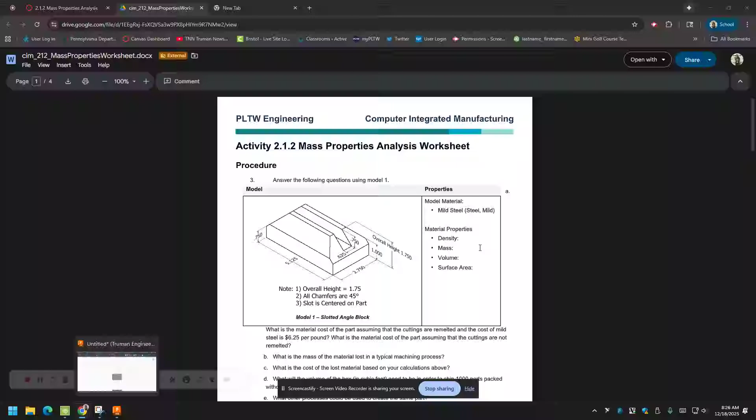All right, so we're here. I'm going to start a sketch on the top plane, and go to rectangle. There's a center rectangle option - this allows us to keep everything symmetrical and centered. Just helpful. The next thing I'm going to do is put in dimensions.

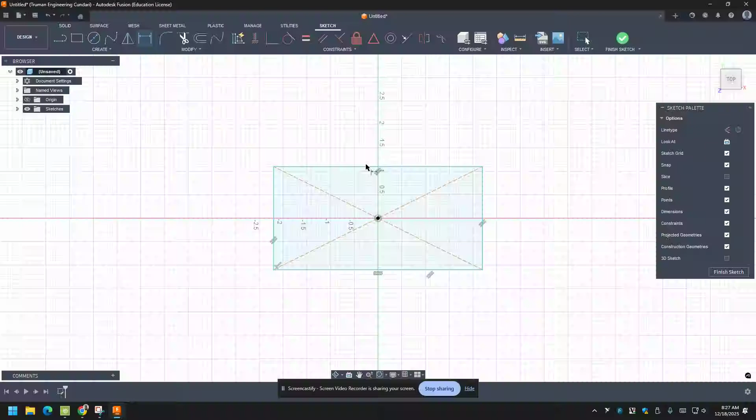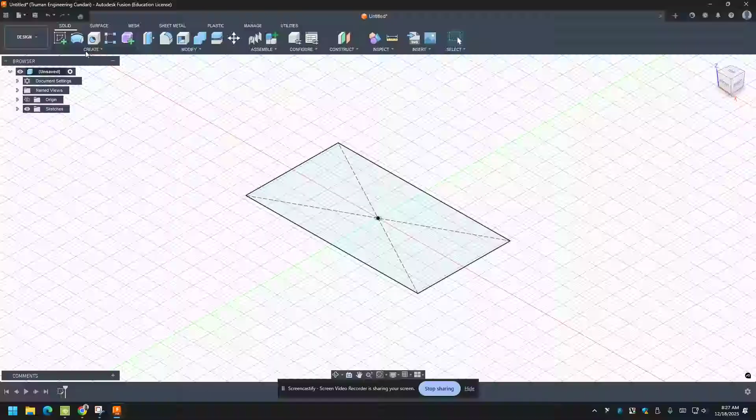So on the paper it said the full length would be 5.125, and the width would be 2.75. And I can finish sketch. Then I'm going to go ahead and extrude it, going up, and I'm going to go to the total extrude.

So we're going to cut away once we have the block. The other thing we could do is grab the information we need from the block ahead of time here, so maybe we want to do that. Let's go up and do 1.75, and I'm going to hit OK.

So what I'm going to do here is go to modify, and we're going to do physical material. It says on this one that it wants it to be mild steel. If I go down into my metals, let's see what we got - I'm sure we have steel, hopefully we have mild steel, we'll find out when we get down here. Yep, right here. I'm going to drag that on there, and now it's mild steel. They look similar - this was steel, this is mild steel, but they wanted mild steel, so we want to make sure we have the right one. I'll hit close, and then I'm going to hit save.

We're going to call this model 1, and the assignment is 212, right? Okay.

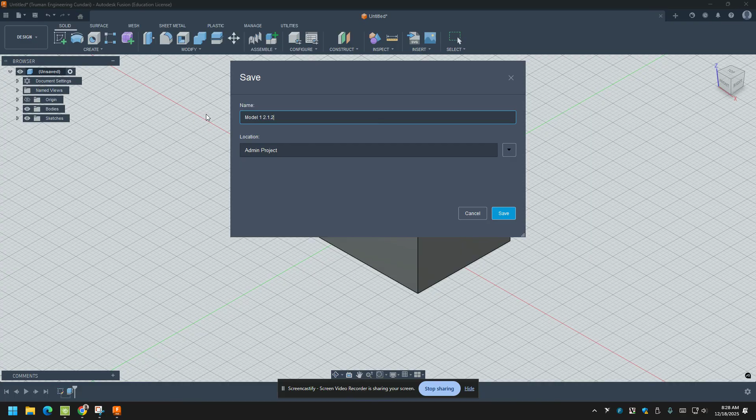So now that we have this, you can actually go through and get the mass of this ahead of time. The other thing you can do is change your timeline later and do that as well. So I'll show you right now what I'm talking about.

So it wants us to know how much material we've lost, so we need to know the mass and density prior to - before we cut away, blah blah blah.

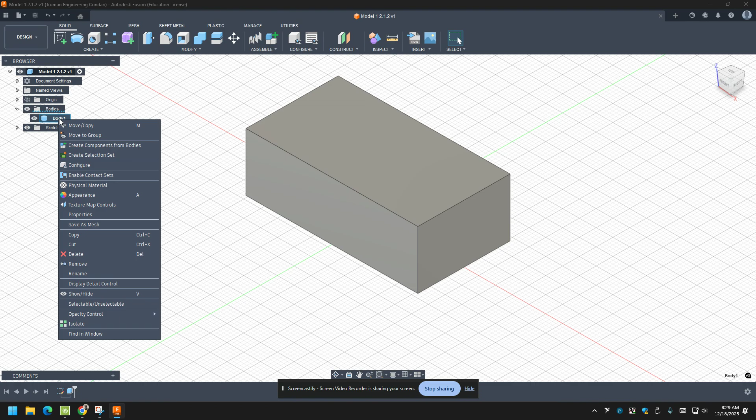So if I go here to the body, or actually to the model, you're going to see all of this information, including properties. And because I made it mild steel, you should have all of this information here that you need, okay? So when you go back to do the math later, it exists.

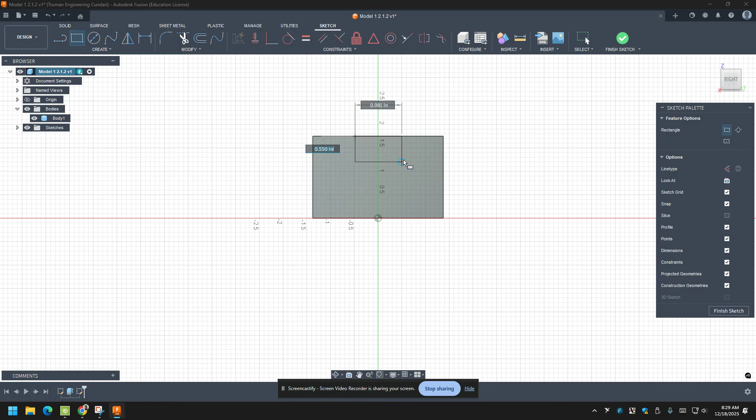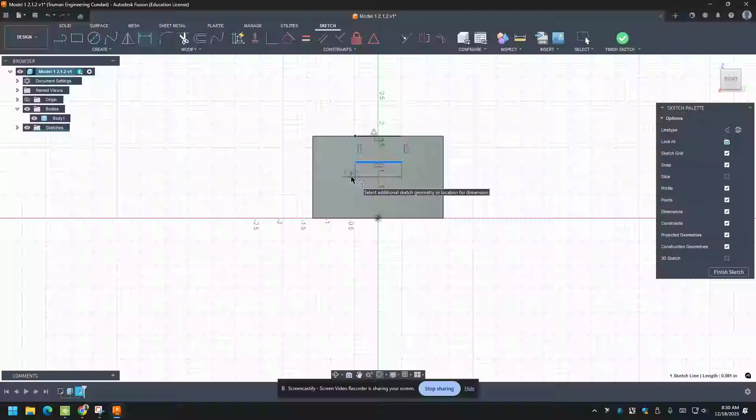And if I did that correctly, let's see - if I do this with this, it'll tie that into that. So now when we do our dimensions, everything shouldn't be blue anymore. So here we're going to go ahead and make this 0.625.

Nope, it didn't do it, so we'll have to go back. And it made this one 0.75. It says 750, but it's going to give you that either way, right?

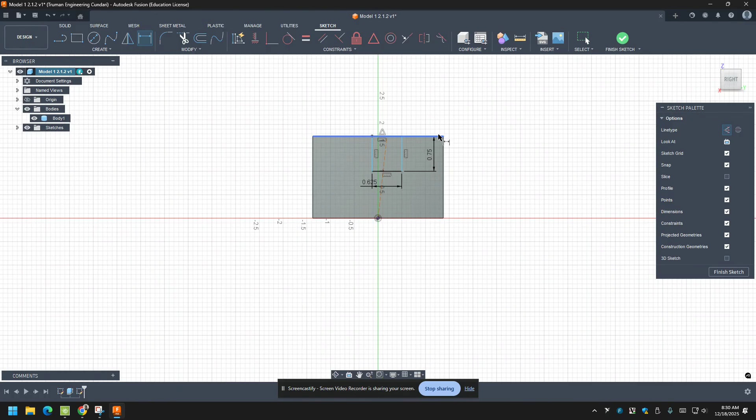So what it did was we're still midpoint on everything, but this is not vertical. So let's go ahead and this is horizontal vertical. If you're used to OnShape, those are separate. And this one, it's the same, and it's the closest to the direction that it's going. All right, so that locked it all in, and we're in good shape.

The other thing it has is that chamfer, and we can do that just here. We don't have to go in and do a chamfer from the directions on the solid modeling.

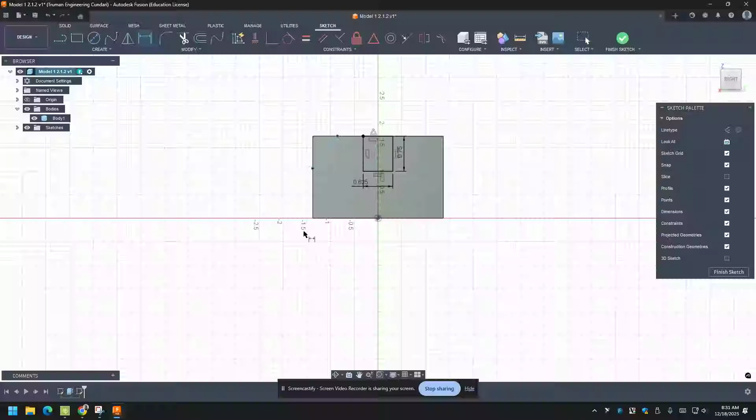Instead, I'm just going to go ahead and do a line tool. And I'm going to take one, this is in, get rid of that construction line. I'm just going to click it from one side to the other. The dimension from here to here, this is where you have to be able to read that isometric. And it's hard. It's not easy to read the isometric. But for this, the dimension would be 1.

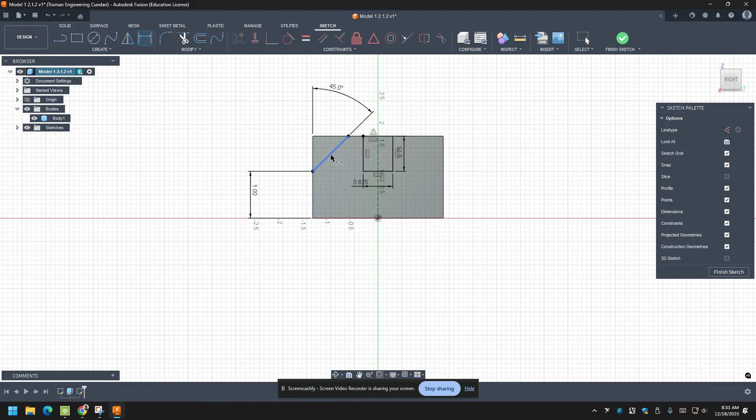Now the direction from there also, it says 45-degree chamfer, right? So we're going to do this as 45. And what we figured out in a different class is if you go in the other direction, this will be 45 as well. So even though it's a driven constraint, you can just see once you type the 45 in, it sticks together.

Then we're going to go ahead and mirror it. And you have your objects and your mirror lines. So let's go ahead with the object. And then let's go with the mirror line. Okay, then I'll hit Finish Sketch.

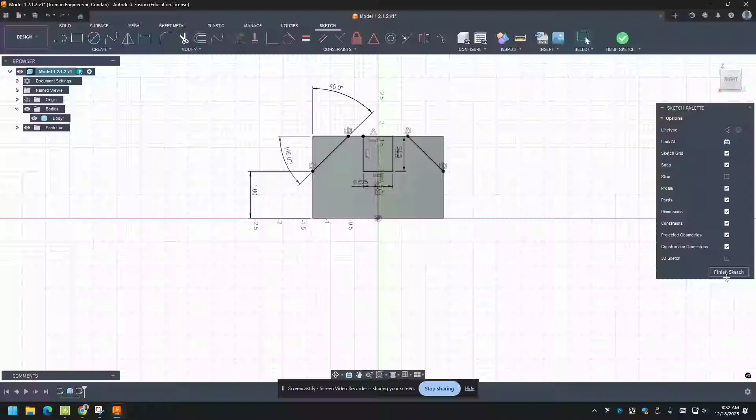And let's extrude. So I'm just extruding through these pieces. And it'll naturally do a cut because I pulled it through like that. And we can hit OK. So in the other direction, it cuts the other way as well.

So I'm going to go to front view. And no, you know what? Let's do a chamfer in the other direction just to kind of mess with things and try the chamfer out and see what you think.

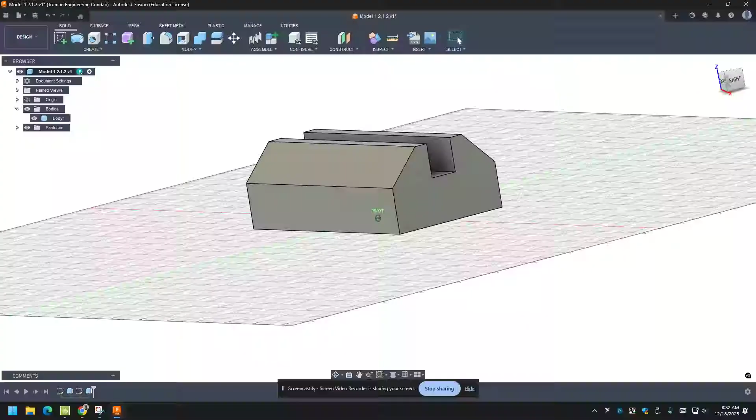So if we drop down on Modify, there is chamfer. And I'm going to go with this and this. And we're going to say it has to go down. How do you know that it goes down to the 75 though? Oh, because you subtract. So here we have 175 and it's 75.

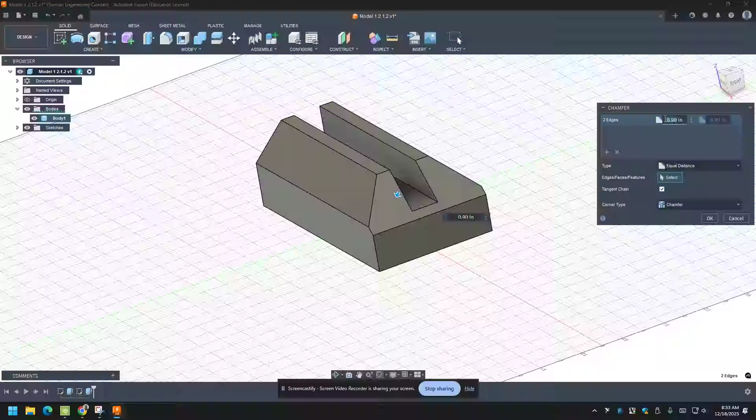So we're going to go down 1 inch. So we're coming from the top down 1, and that should make it that 75, which it did. So that's great. And let's hit OK on that and do the other side.

We could have done it maybe at the same time, but it's OK. And then again, this side and that side. We're going down from the top 1, which leaves us with 75 because 1.75 minus 1 is 0.75.

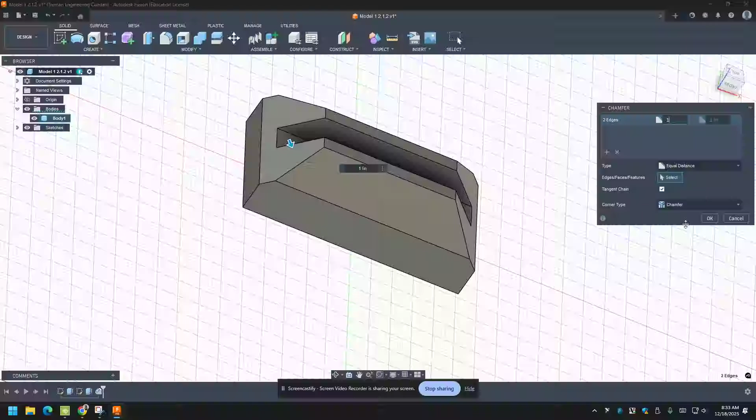All right, so now we have the actual build. If I go ahead and hit isometric, it looks exactly like our technical drawing.

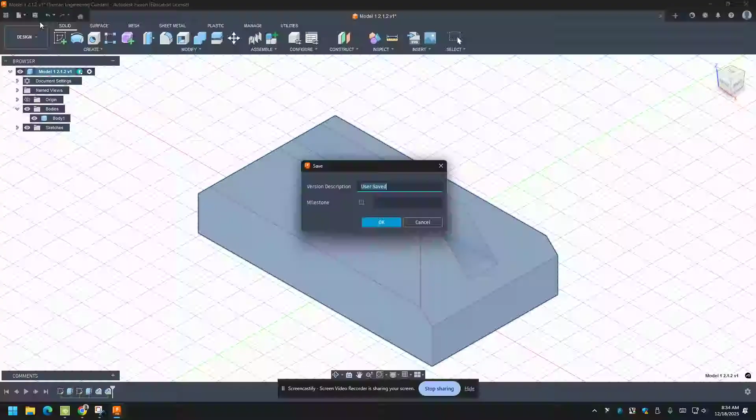So now when you go back, you're going to go back into those properties. So right click here. Oh, and hit save again. And it should save version 2 now, right? So we're going to say cut away.

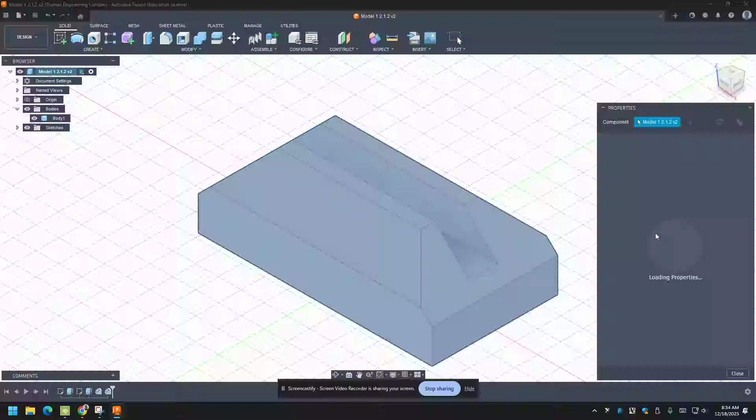Okay, so now if I go to my properties, right click, you now have the new mass, volume, density, everything you need.

What you can do is, can I move this within? Can I do that? And will it change it? No, okay. So then when we go here and we go back, there's your old mass, volume, density. So you can go back and forth.

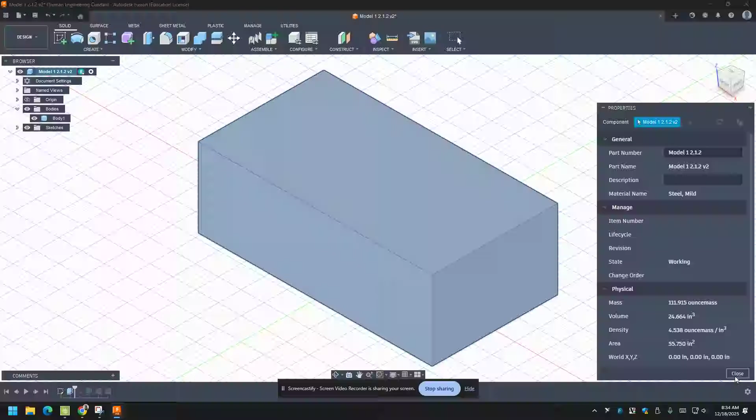So 111 minus, I mean, obviously you want the whole thing, but there it is. 81 or 82, you know.

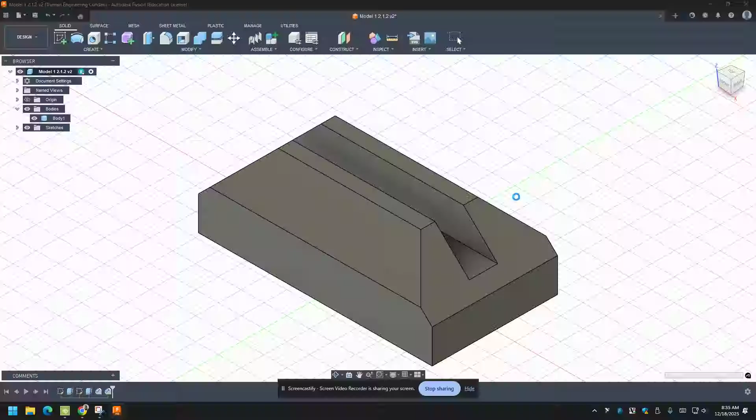So once you go ahead and do your math on this, you'll be able to answer the problems. So that's all there. So we're going to hit save so that we've saved it. All right, and you can answer the problems that you need for this assignment. Good luck.